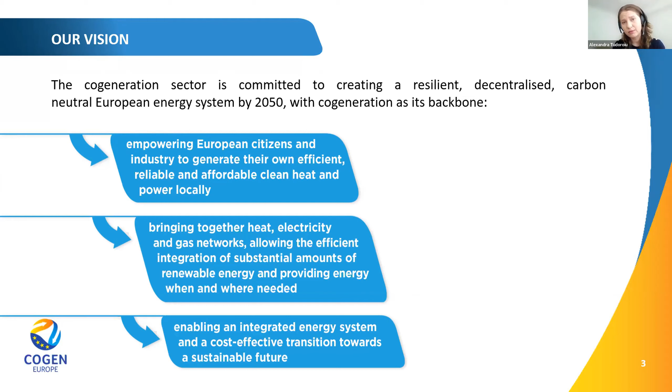And so cogeneration does not only enable energy efficiency, but also higher integration of renewable energy sources and a more resilient energy system, because of course, we also provide more flexibility to the energy system, complementing renewable energy and electrification that we see is increasingly promoted.

So what is cogeneration? For those of you who are not familiar with the technology, cogeneration uses one input, and that can be any kind of energy source, from conventional energy sources like natural gas, to geothermal, solar thermal, also hydrogen that is being discussed quite a lot these days, any renewable gases, and less known solutions like waste heat. That can be a fuel input to cogeneration.

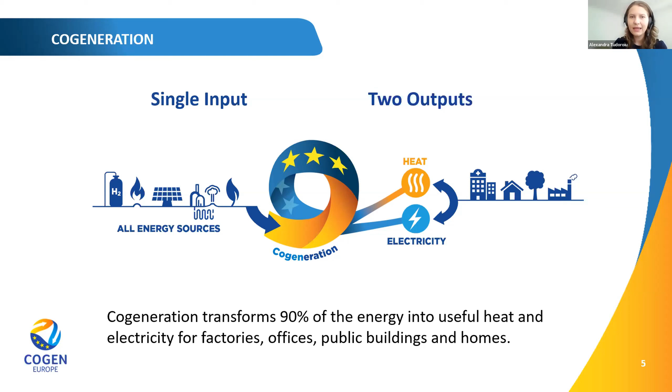So what are the benefits of CHP? Of course, energy efficiency and resource efficiency is the key benefit of cogenerating heat and power. However, in using energy sources that are available more efficiently, cogeneration also reduces CO2. As I mentioned before, it integrates energy systems at local level by flexibly supplying electricity, but also efficient heat, and also integrating, in some cases, the gas networks.

It also supports electricity grids, and as electrification is more and more taken up, we will need dispatchable and decentralized electricity production to ensure that electricity is available when and where needed. With CHP, we reduce the overall energy costs of the energy system by also reducing grid losses, since CHP is produced and consumed locally.

And this goes into more detail on how CHP supports energy efficiency. So compared to conventional technologies like power-only plants and boilers, CHP makes more with less, so it generates 40% more productive energy, as shown in this example, compared to an average boiler and an average power plant. It saves at least 10%, as mandated in the Energy Efficiency Directive, compared to the best and most efficient boilers and the most efficient power plants.

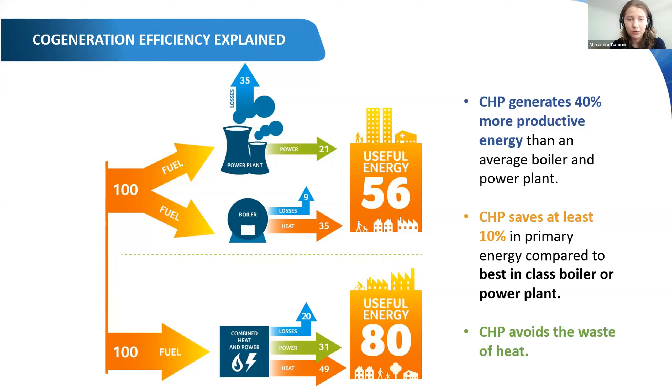And in addition, as it is located next to the point of consumption, it also reduces grid losses, which tend to be quite significant. So zooming out from just cogeneration and looking at the whole energy system, we see that quite a lot of energy is wasted across the whole energy value chain. Looking at the electricity sector in particular, conversion losses are quite significant.

So from 400 MTOEs of energy input, and this includes all thermal fuels, we still have coal in our mix, but also natural gas, biomass, biogases. It also includes PV and wind, the intermittent renewables. From all this fuel input, more than half is wasted as heat discharged into the air. And 22 MTOEs are also lost in the grids just to transport that electricity to consumers. To put things into perspective, the whole heat demand of EU buildings amounts to 192 MTOEs.

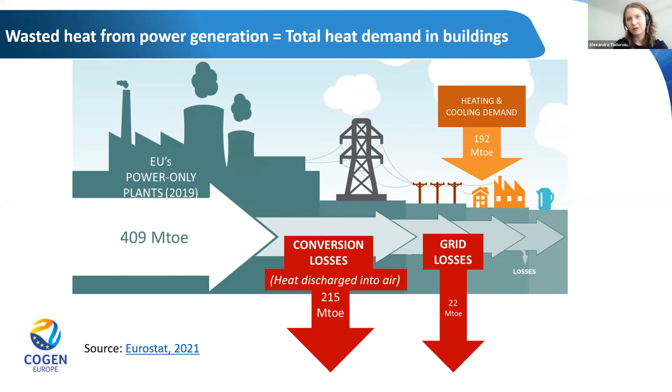So if we were able to recover some of this wasted heat and put it to use through district heating or in industry, we would already reduce energy consumption, significantly reduce gas consumption, and make the whole energy system less costly, as well as ensuring that consumers do not pay for energy that is wasted before it even reaches them.

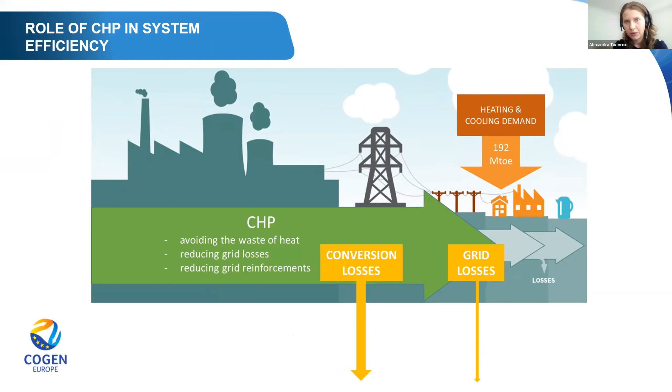So how can cogeneration contribute? Cogeneration uses all these fuels more efficiently, and it avoids the waste of heat, putting that heat to good use. It reduces grid losses, and it reduces the need to reinforce electricity grids, which will become more and more important in the coming years with a focus on electrification.

And of course, you can find CHP everywhere. As I mentioned before, there are applications in industry, in district heating, and more innovative applications in individual buildings. And this is not always acknowledged. EU policy as well as European Commission strategies like REPowerEU focus quite a lot on end-use energy savings, which are necessary, but do not focus enough on the whole energy system.

And in the current serious context of the war in Ukraine, it is important to understand that natural gas is not only used in buildings or the electricity sector, it's also used in district heating and across the whole energy system. So if we want to significantly reduce our dependency on Russian gas, but more importantly, for the sake of the environment, our dependency on fossil fuels, it is important to look at the whole energy system rather than each sector in isolation.

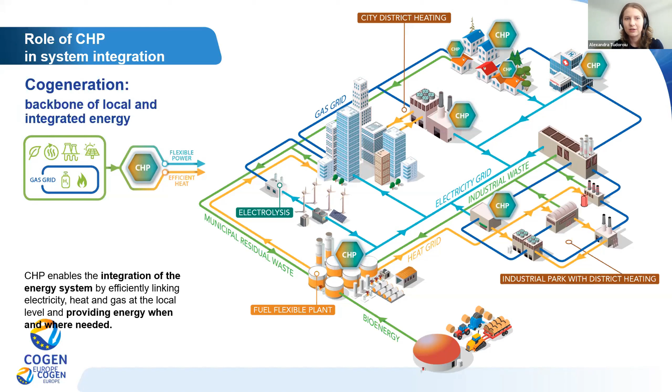So with that introduction, I would like to very quickly switch to our case studies today. As I mentioned, REPowerEU focuses on rapidly reducing our dependence on Russian imports of all fossil fuels, natural gas in particular. In that context, I will share a few numbers ahead of the panel discussion, but we have chosen some quite exemplary cases of cogeneration that already contribute towards significant energy savings as well as security of supply.

So this is the overview of our speakers. We will start with 2G and the example of Hassfurt city in Germany, presented by Andre Banken. Then we will continue with a case study from Belgium, focusing on local production of biogas, achieved with the help of CHP. This will be presented by Mr. Jiří Jansa from TEDOM and Christopher Stuntz from Cortec Energy.

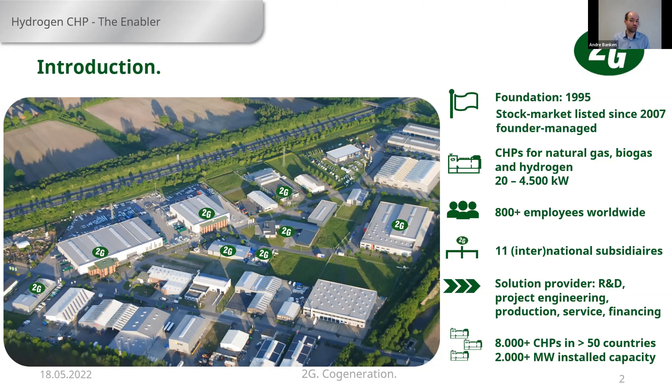And our install base these days is more than 8,000 units in give or take 50 countries. Among the EU members, I would say every single one of them is represented. And the total installation capacity by end of last year was around 2,000 megawatts of electrical generation capacity. And of course, the same amount of thermal generation capacity likewise. What a cogen system is, Alexandra already gave you all the facts and figures there. Just let me point to one item.

CHP, of course, is heat and electrical power, but that heat can be used in quite diverse ways. So you can use it as hot water, which is the most common one, but it's also possible to utilize that heat as steam production or even as cooling energy via combinations of absorption chiller technology or a steam generator. So it makes CHP application, especially for the commercial and industrial sector, much more versatile, as the type of thermal energy that is actually required on site can be provided in combination with a cogen system.

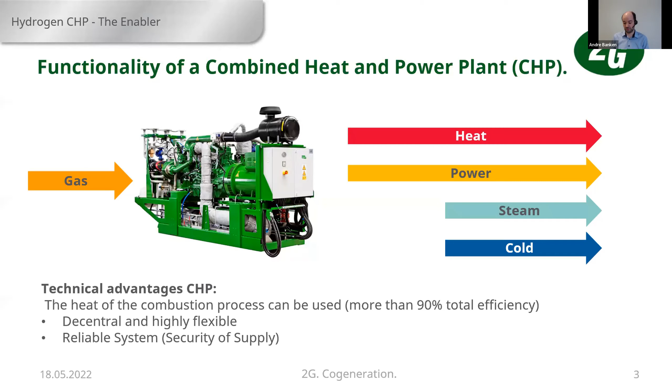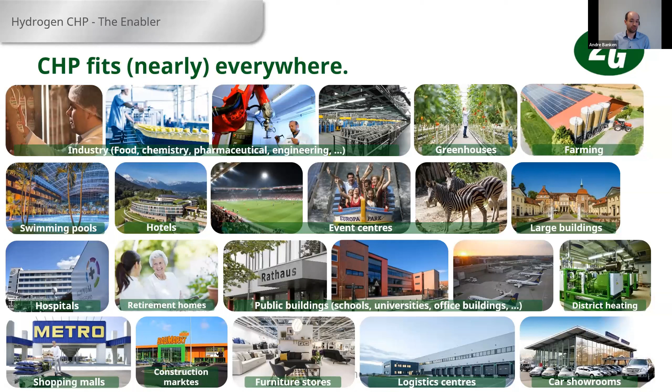In recent years, and this is the 2G perspective, especially the two sectors in the middle that you can see here, let me put on the laser pointer, had a strong drive. So the food and beverage processing industry, as well as the general manufacturing industry, have, from our perspective, become more attractive for cogen application, as both of these industries have 24/7 production cycles and a constant demand for power and heat. And especially the food and beverage sector is a high quantity, low margin business. So every cent on energy costs saved is profit for them.

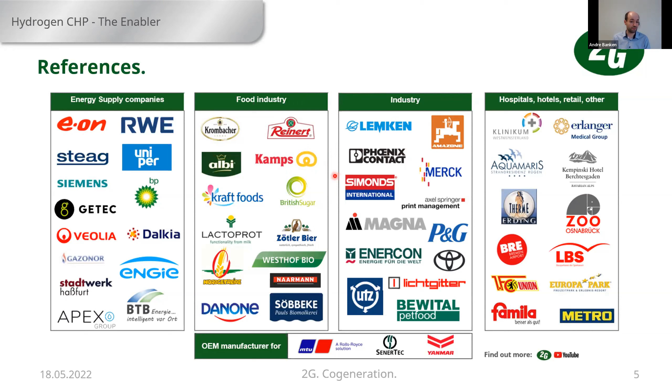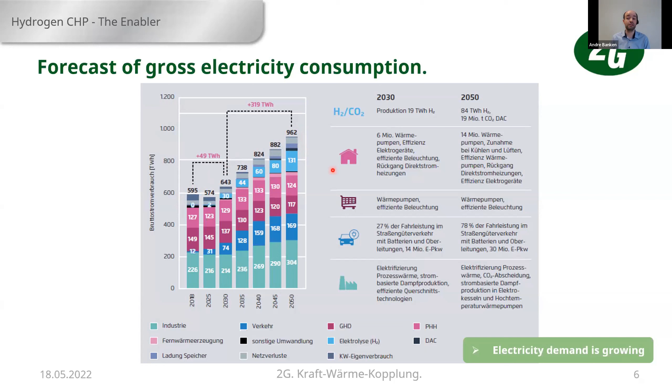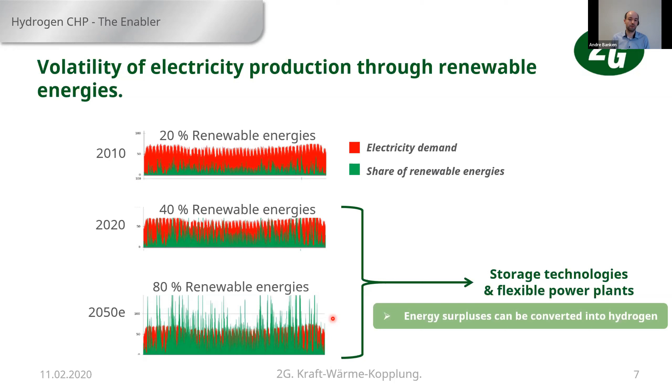And this is again where cogen technology, where cogeneration systems come into play to address both the increasing energy demand and the increasing volatility in the power grid. So cogen by hydrogen can be a stabilizing factor.

But of course, in the same manner, we do not only want to have a decarbonization of that power supply, but we also need to address the increased power demand and further have CO2 emission reductions.

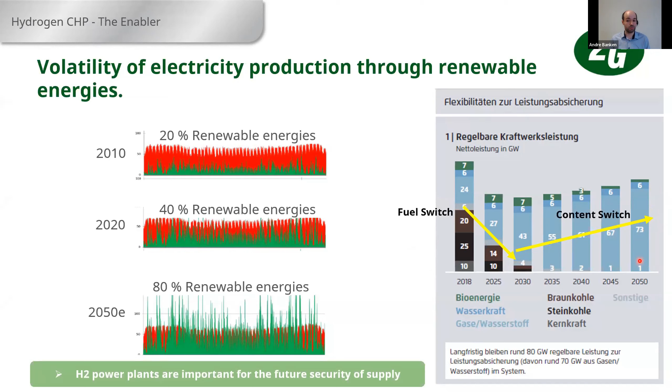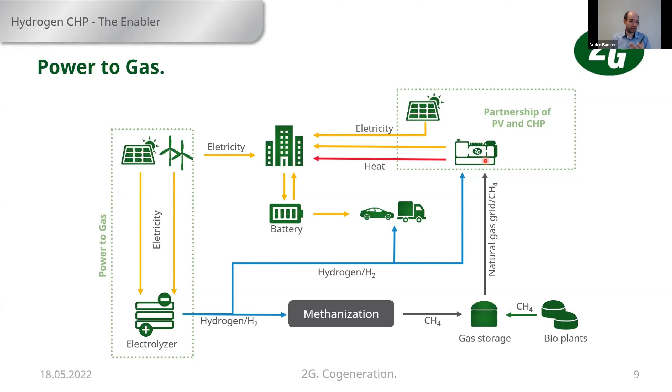How that works is obviously with power to gas technologies. I guess most of the participants here are familiar with how it works. The excess electricity from wind and solar is converted into hydrogen and then either directly used on site, for example for fueling cars, or in a locally installed cogeneration system where it can work in conjunction with the other renewables, or it is injected into the existing gas infrastructure where it is mixed with green gases coming from biogas plants and biomethane injection facilities to have an overall, as I mentioned earlier, content switch in the infrastructure.

From the technology perspective, 2G is a gas engine-based cogen system manufacturer. It is possible to have that change. So if you have systems that are running on natural gas or biogas today, they can be converted in the field to hydrogen operation. Without bothering you with the technical principles, in general, we change from an external gas-air-fuel mixture system to an internal one, a so-called hydrogen injection one. And this allows us, with the gradual increase of hydrogen and green gases in the overall gas infrastructure, to use and utilize cogeneration systems at the distinct installation site for the demands of the customer.

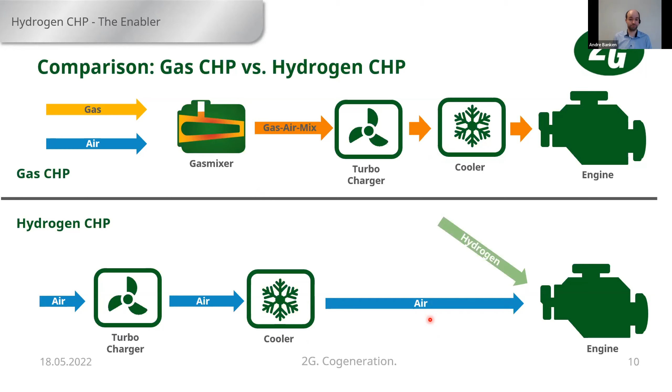Furthermore, it's a highly versatile system because we do not have to consider it as the flipping of a switch, but if necessary, as a gradual changeover. So with increased change of the composition of the gas infrastructure, with the supply of natural gas from different countries, with the additional injection of biomethane, and with the utilization of hydrogen, cogeneration technology can cope, can match all of that. So it is a future-proof technology that allows, with an increased operational capability, to cover residual loads and also peak shaving, helping to stabilize the public electricity grid.

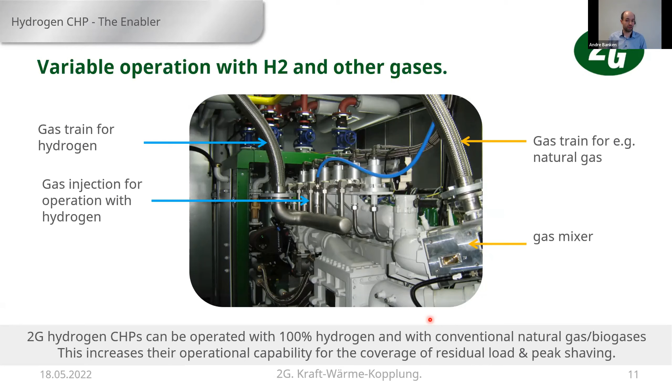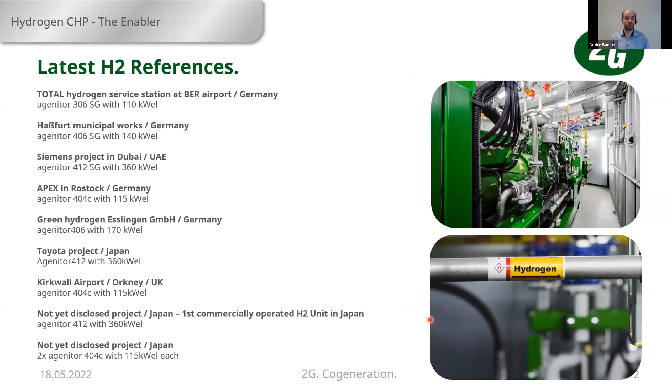The number of references our company has is increasing. You see here an overview of that, but as initially introduced, we want to focus on the city of Hassfurt, which is in South Germany. And there you basically already have how some envision the future energy infrastructure. So you have renewable energy, which is locally installed by wind and solar and even biogas.

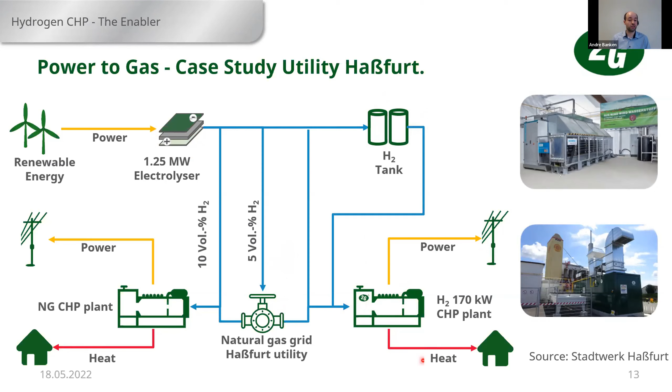Excess energy that cannot be used in the Hassfurt city energy infrastructure is then via an electrolyzer converted to H2 and either stored locally, so they have a 12-hour H2 storage there, or directly injected into the existing gas infrastructure of the local utility. The cogeneration systems then produce the hydrogen-based power on demand. So when there is a gap in power supply by wind and solar, depending on weather conditions, the thermal energy is injected into the local district heating.

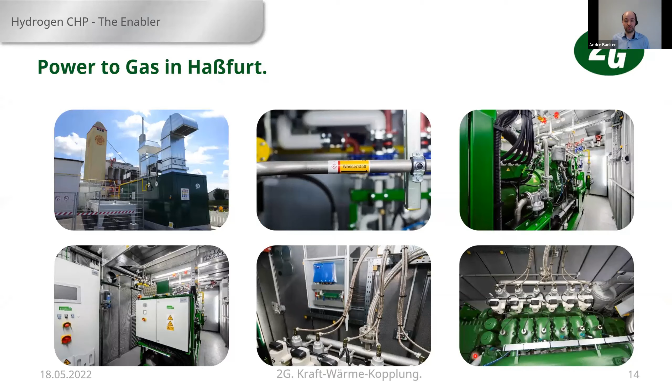You can see a few pictures of the system there, how it is installed. That was done back in 2018. So it's not brand new. It's already in operation for a couple of years. And here again, the quick numbers. So 1.25 megawatt PEM electrolyzer, H2 CHP unit, 170 kilowatt electrical, 200 kilowatt thermal, a 12-hour hydrogen storage, and even a station for the H2 injection into the existing gas grid in case that storage is already full.

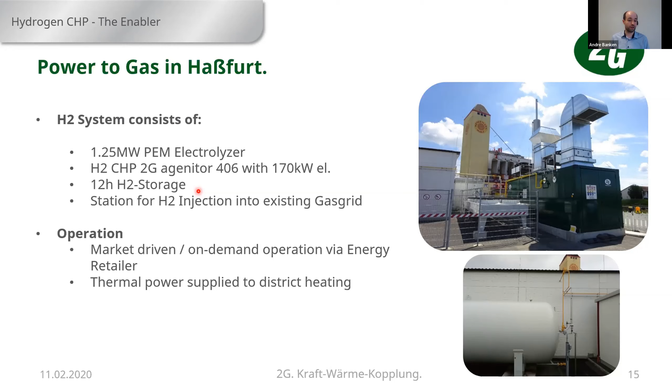And why does that make sense in the case of Hassfurt and much more in the greater concept? This is how their energy supply concept already looks today. So 10 megawatt of PV already installed, 31 megawatt of wind already installed, 2.35 megawatt of biogas plant capacity installed. So they have wind, solar, and biomass, which is operated with an overcapacity 3 megawatt biogas cogen system. Again, power supplied to the energy infrastructure of the utility, heat injected into the district heating network. So the entire city has district heating available in conjunction with smart metering and the transformer stations, to better regulate the power supply and demand.

And of course, they will add more electric vehicle charging stations. So the city just started with that, but they want to increase that over the next years as well, making the power demand in the city more challenging. And to save that excess energy from 10 megawatt PV, 31 megawatts wind, and 3 megawatt biogas, this electrolyzer was installed that I showed earlier with a localized H2 storage, so that the stored energy can be converted back into power and heat on demand as required. So this is already existing today.

What Hassfurt wants to add in addition to that is an 8 megawatt battery storage with a challenging 10,000 smart meters in shops, in restaurants, in local hotels, local companies, public buildings, to establish a smart grid so that really the management of power supply and demand, not only electrical, but also in heating, can be managed much, much more sophisticatedly. And also a hybrid compensator energy storage shall be included there.

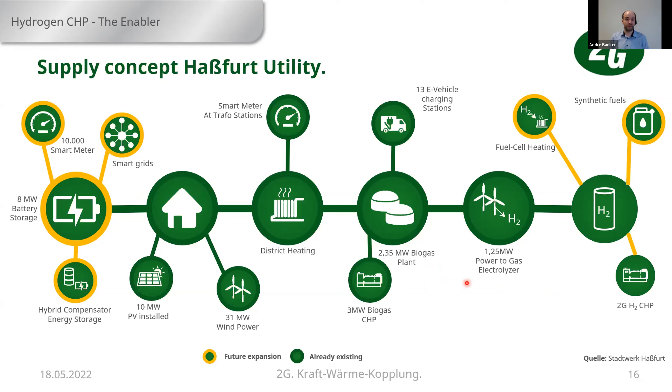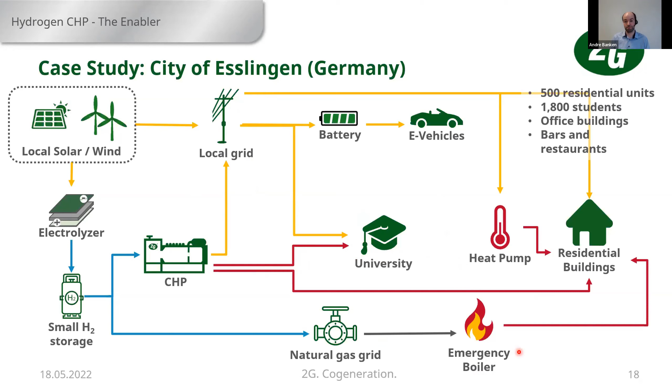So to summarize, from our perspective, CHP can and should be one of the backbones of the energy transition. It's a decentralized supply. That means power and heat is produced where it is needed, when it is needed. It helps to stabilize the grid. These units are highly flexible to provide power in case of grid fluctuation, so it helps stabilize the power grid. Therefore, it contributes to the security of supply in general.

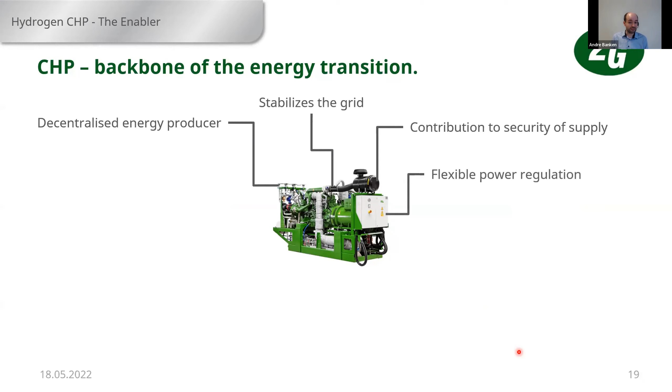It's highly flexible on-demand operation, as I mentioned earlier. It's compatible with virtual power plants, so you can operate them in concert with other thermal and electrical energy sources. It is highly efficient, as Alexandra introduced earlier, therefore very economical. It's easy to maintain, as globally trained personnel is available. And of course, it's highly flexible when it comes to the fuel supplied.

Hydrogen is a possibility, also so-called waste hydrogen, for which we receive a lot of inquiries from the chemical industry right now, which often have unused hydrogen available as a byproduct from their day-to-day production process. Gas engine-based cogen is insensitive to the impurities from that waste hydrogen, so that can be utilized as well.

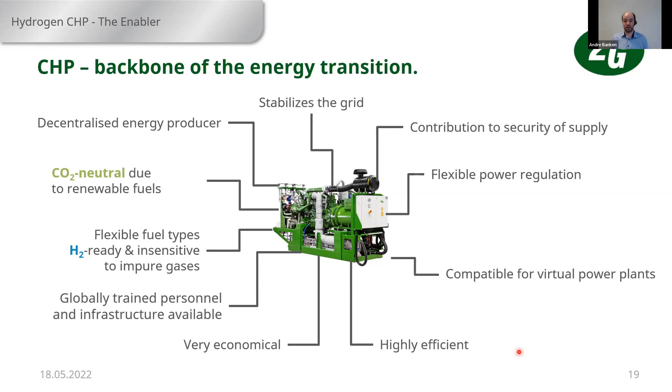And of course, it's a CO2 neutral technology due to the increasing composition of hydrogen and biomethane in the overall energy and gas infrastructure, so that we really have a reliable, affordable and also sustainable way of producing electrical and thermal power right where it is needed for the end user base. It doesn't matter if it's a residential, an industrial, or a commercial application.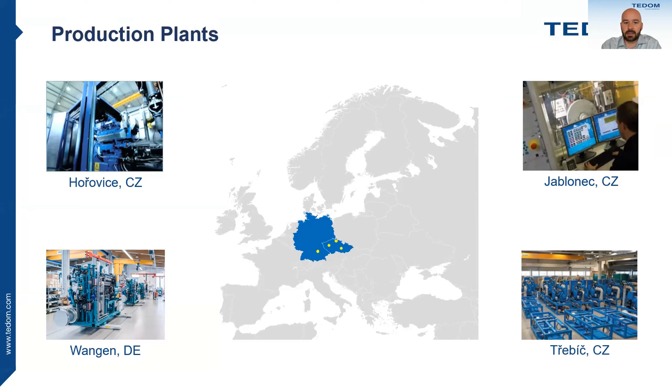We are exporting and have subsidiaries all around the world, most importantly Czech Republic, Slovak Republic, Poland, Germany, and United States. In other countries, like Belgium, we work with business partners that provide sales and services of our equipment, and even installation and operation. The CHP portfolio starts from 20 kW up to 4.5 megawatts.

The portfolio is designed for all gases, meaning natural gas, but also, the topic of today, other renewable gases: biogas, coal mine gas, sewage gas, any gaseous fuel with methane content. We are also ready for the hydrogen mixture that is available in the pipeline and will be available in the next 10 years in certain content in the current infrastructure. The portfolio is already ready for a mixture of up to 20% hydrogen. So if there are questions about the readiness of the technology, we are ready for the hydrogen that will be available in existing infrastructure.

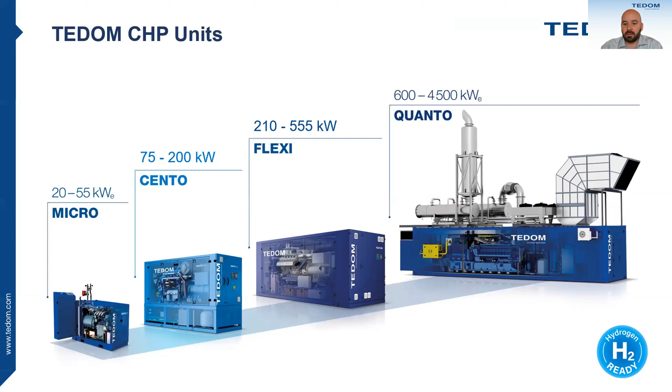And as time goes, there will probably be parallel infrastructure for hydrogen by the time complete, pure 100% hydrogen technologies will be available, even in our portfolio. But that's the question for the next 5 to 10 years, as was presented in the previous presentation.

One slide where we see the big potential of CHP, and it was also mentioned already, is the flexibility of the CHP, of the whole portfolio, not of the individual CHP itself. When we combine the portfolio together, we can provide balancing of the network. And we already did a pilot project for the Czech transmission system operator, where we aggregated one block and certified it for ancillary services, and we are already providing regulation, negative regulation, for the TSO.

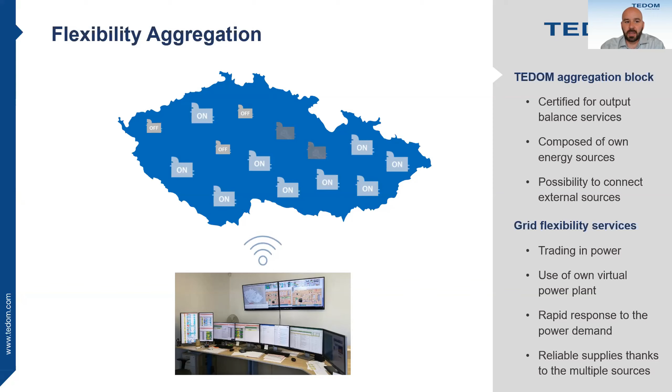This system works on biogas and landfill gases, where we can stop production and down-regulate the power output to the grid. With these systems, we are helping the TSO at times when the electricity is not needed, especially when there are a lot of renewables connected to the electricity network, solar and wind, and they need to be balanced. This is an important part of CHP for the future, and it will play a more and more significant role as time goes on, because we will need to balance the grid with more unstable sources being connected to the network.

To be able to do those more advanced features and provide services that are important for CHP owners, we also acquired an electricity and gas seller. So we are offering gas to CHP owners and buying back the power. So CHP owners do not need to care about trading and operational stuff, and we can do one-stop shop services for them, including financing and operating of the CHP sources.

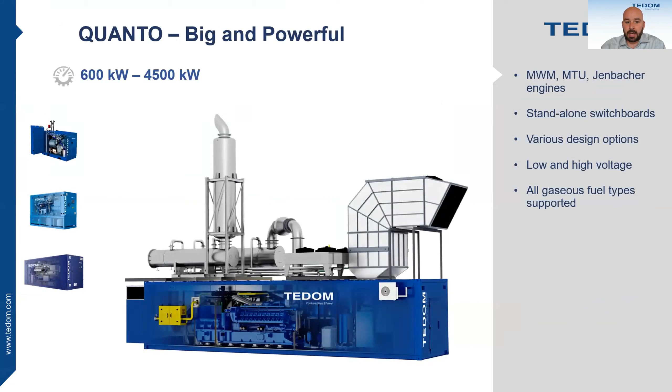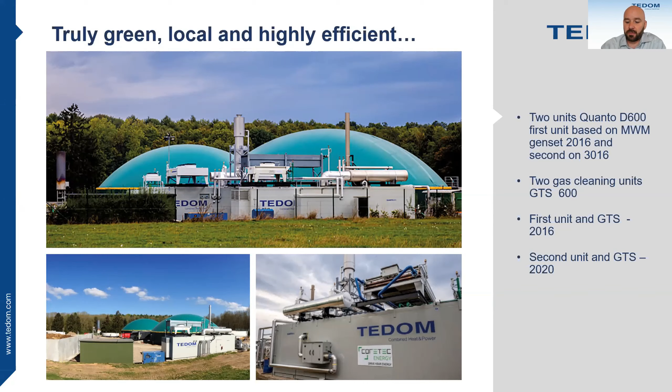Now we are getting to the project. We used the Quanto system for the project in Belgium, which is shown in the picture. Here is the picture from the site, where you see the biogas plant in the back, and in the front two CHP systems from TEDOM, which are based on MWM engines. The first unit was delivered in 2016 and is based on the MWM engine. The second was delivered in 2020 and is based on a newer, more efficient type of engine. Both CHPs were delivered including the treatment system, which filters the gas and provides cleaner gas for the CHP.

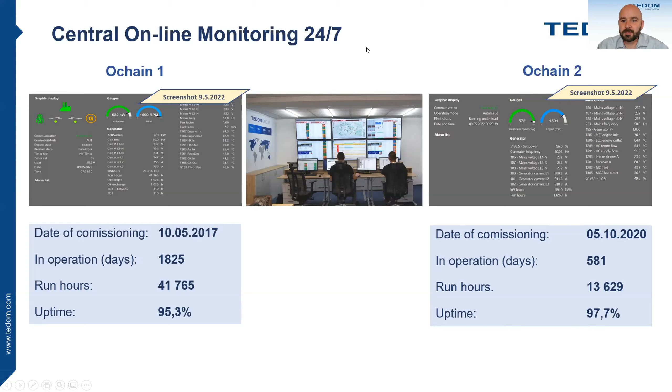And with this, I will hand over control to Christoph, who will tell you more about this project from their perspective as operator. Christoph, it's up to you now. Yes, thank you, Jiri. I'll try to control it. Yes, I can. Perfect. Great. So thank you, Jiri.

Hello, everyone. I'm Christopher Stunz, responsible for the thermal business unit at Coretec. Before detailing the project, I would like to quickly introduce Coretec Energy. We are located in Belgium, near Liège, and our mission is to improve the competitiveness of all our clients by optimizing their energy costs. For that, we have two main parts in the company. One relates to all the projects for which we study, finance, implement, and provide complete maintenance, operation, and remote monitoring of high-performance production systems, such as CHP units running on natural gas, but more and more on renewable gas, and we are also involved in biomethane projects.

On the other side, we help all our clients with their energy strategy for purchasing and sales, as well as for trading the green certificates that are generated with the production of electricity through CHP units in Belgium.

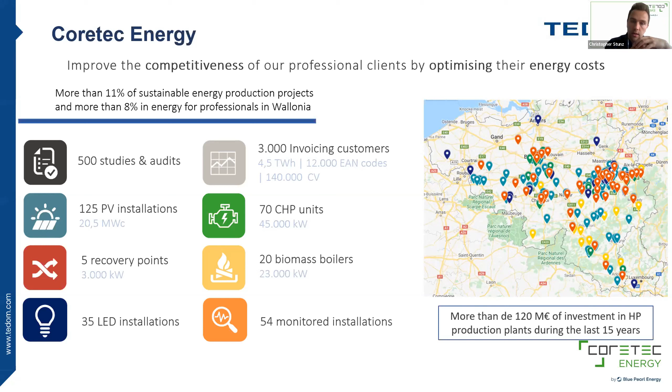In recent years, current projects, but also those to come, have increasingly concerned engines running on biogas rather than natural gas. Now concerning the Ochain Energy biogas plant, in which Coretec is a minority shareholder and also the integrator. We took care, as Jiri said, in partnership with TEDOM, of the integration of these two units in container, and also associated with the treatment of the biogas for each.

Coretec was also involved to realize the medium voltage and the low voltage electrical works on the site, as well as the system for the main regulation of the whole plant for remote control. And after the first CHP unit installation, a heating network has been done. So as Jiri said, the two units are in container, each one with full power of 600 kilowatt, but the capacity of the digester is limited to approximately 1,000 kilowatts.

So that's why in your example, you say that the two CHP units are not running at full load, but it's designed like this to have a little margin. So it's just normal. The actual annual production for the combined units is 8,000 megawatt hours. So they produce electricity with a quite good efficiency of approximately 40%. And it is also valorized as hot water.

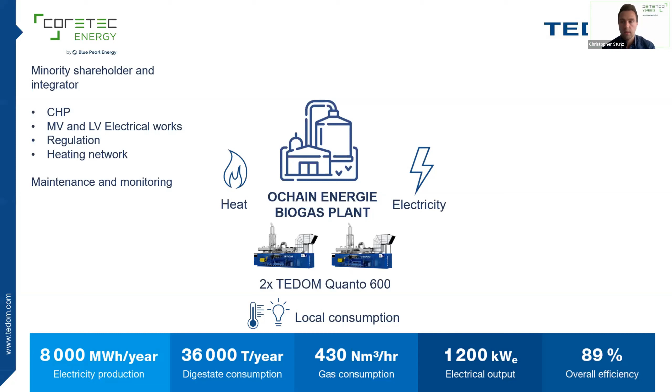Yes, so they produce, as I said, electricity and hot water. All the production is dedicated to local consumption. And the heat is, of course, valorized in the digester, but after that, with a heating network of approximately 2 kilometers, the hot water is valorized to heat a nursing home. And this allows the nursing home an annual saving of more than 150,000 liters of fuel per year.

The main part of the electricity is sold to the grid, which is, of course, the main income of the whole plant, in addition to the green certificates. So the digesters are fed with more than 30,000 tons per year of agricultural waste within a maximum perimeter of 20 kilometers around the site, and also with waste from the agro industry. And all the remaining digestate is used as local fertilizer by the farmers in the surrounding fields.

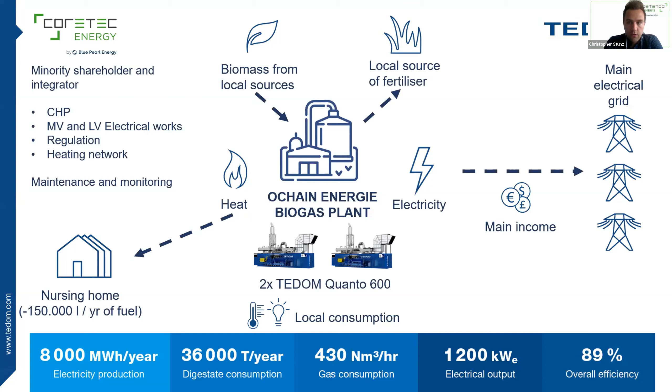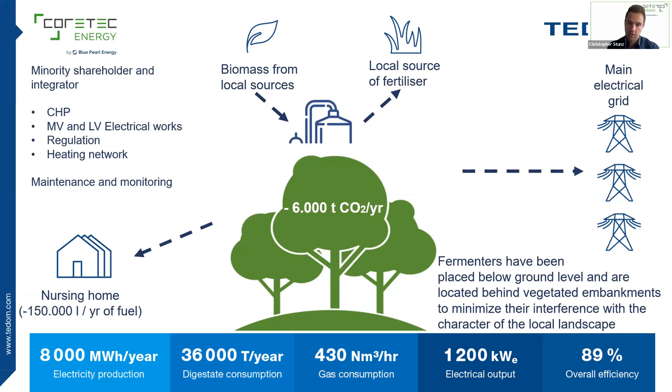This installation has also been designed to have, I would say, a minimum impact on the landscape. So it's located behind the woods. We also have a part of the digesters that are constructed below the ground level. And annually, it contributes to a saving of a bit more than 6,000 tons of CO2 per year. Yes, that's it. Thank you for your attention.

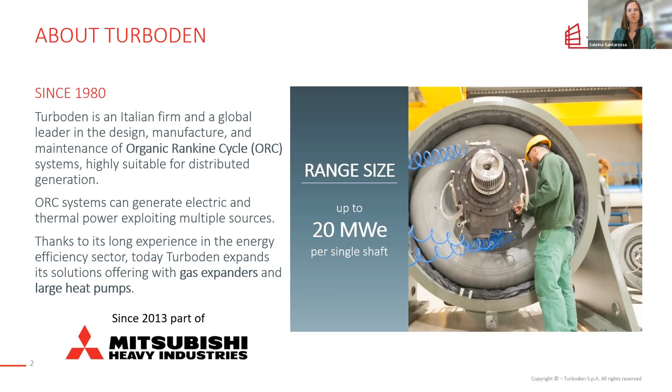The size of our product ranges from 500 kilowatt up to 20 megawatt with a single shaft. And the ORC can be used in connection to different kinds of sources. In any case, we need a thermal heat source. And today I will focus on industrial waste heat that is available from several industries, the hard to abate industry. We are not producing only ORC. In the last years, we are also producing large heat pumps, I will briefly also talk about this, and gas expanders. And since 2013, we are part of Mitsubishi Heavy Industries Group.

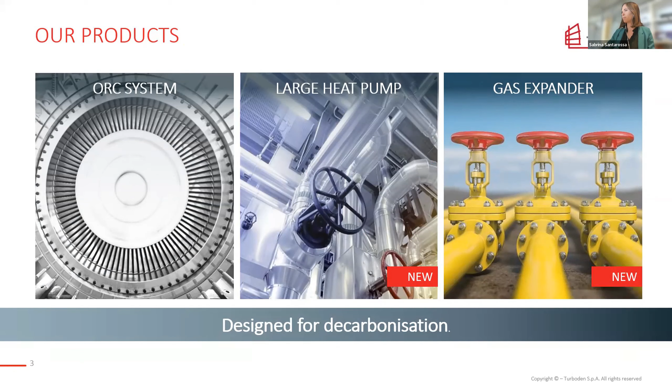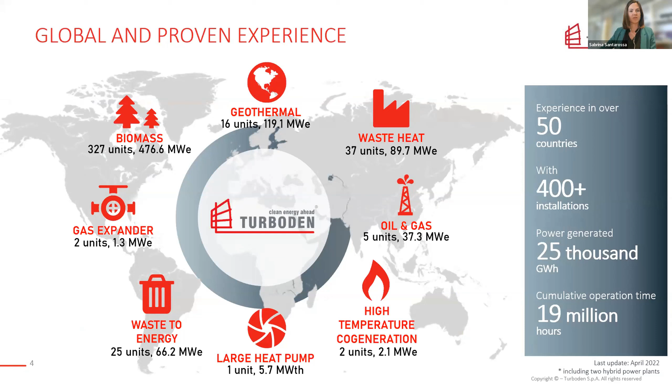And as you can see, we have also sold 2 gas expanders and 1 large heat pump that will start up in the next month. As said, our technology can be connected to waste heat from industry, and so we can help industries reduce their energy consumption from the grid. So our products can be combined with different heat sources that can contribute to decreasing CO2 emissions.

Our technology is usually in scope 2. So we help to reduce the energy consumption from the grid, and not a direct reduction of the CO2 emissions of the industry itself.

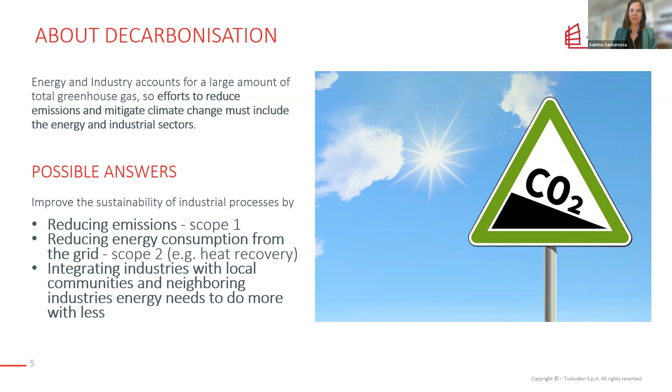Some characteristics of our technology are that it's a very simple, automatic technology, is not typically supervised, and can be remotely monitored. We don't consume any water, so we also have the benefit of not consuming water, which is becoming an issue in most countries. And the maintenance activities are reduced. It's an easy technology, but also easy to integrate in the industrial process.

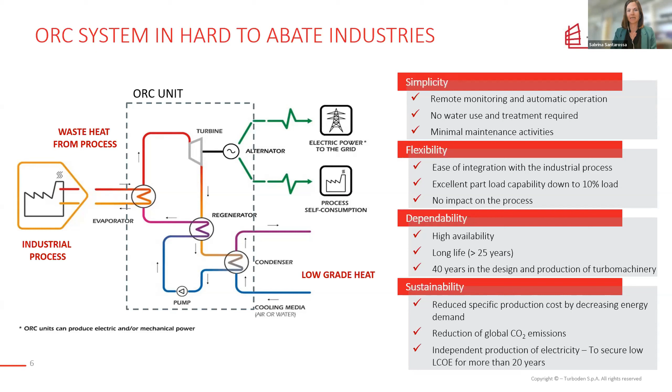And also very important these days is the fact that you can assure an independent production of electricity with a fixed cost for more than 20 years, because you are producing the energy with something that you already have. You don't have to burn anything in addition to produce this electricity. And so you are less exposed to the volatility of the electrical energy market, like we are seeing in these last months and during this last year.

Going deeper into the project that we are presenting today, this is a heat recovery project in a steel factory. They have an electric arc furnace, and we are recovering the heat from the exhaust gas of the electric arc furnace. The customer is Ori Martin, a steel mill close to our office, and the plant has been in operation since 2016, so 6 years now. The size of the ORC is 2 megawatts.

What is interesting about this plant is that we are not only recovering heat to produce electricity. This actually happens during summer. In winter, the heat that is recovered is sold to the local district heating network owned by A2A, one of the biggest utilities in Italy.

And so in summer, thanks to the ORC technology, we can light up to 700 houses, while in winter, thanks to the district heating network, we can heat up to 2,000 houses. This is equivalent to avoided CO2 emissions of 10,000 tons per year. That means not burning 1.7 million standard cubic meters per year of natural gas, which is quite important to underline in this period.

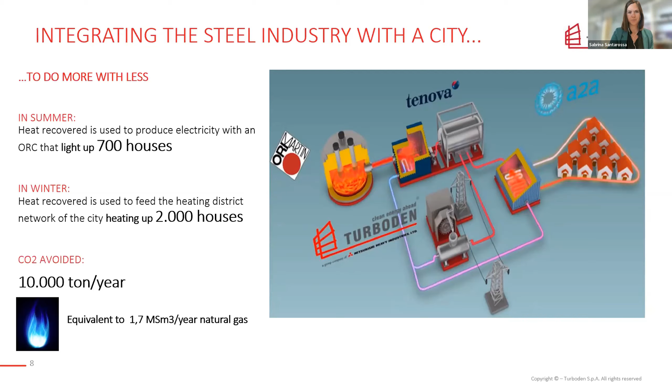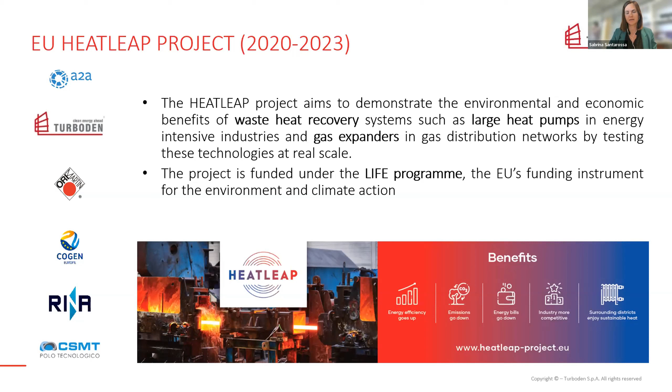In 2020 we also developed, together with A2A, with Ori Martin, also with COGEN Europe, with RINA, and with CSMT, a new project under the LIFE program. It is a funded project to increase the heat that is sold to the district heating network, to help further decarbonize the district heating network that is present here in our city. This is possible thanks to another technology that we are providing, the large heat pump.

So the new scheme will be the one shown here. We have the electrical furnace and, as you can see here, the primary circuit where there are the exhaust gases. There is this production of heat that is used, as I told you before, in summer to produce electricity, and in winter is sent to the district heating network. We insert the large heat pump in the secondary circuit.

So the low temperature circuit that is used to cool the electrical furnace. Usually the temperature of this water, because they use water to cool the electrical furnace, is low, let's say low-medium temperature, but surely lower than what is required by the district heating network. So thanks to the large heat pump, we can increase the temperature of this waste heat available, also waste heat at low temperature, and send it to the district heating network.

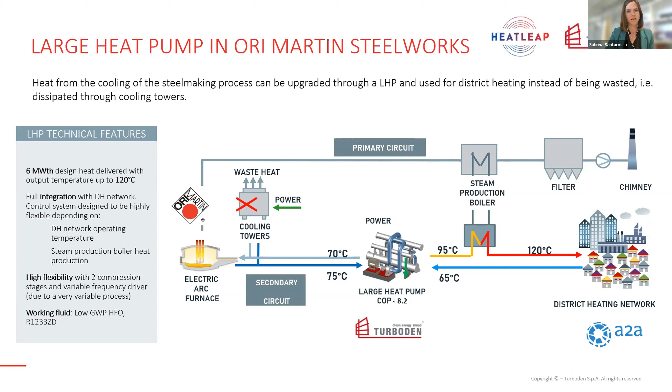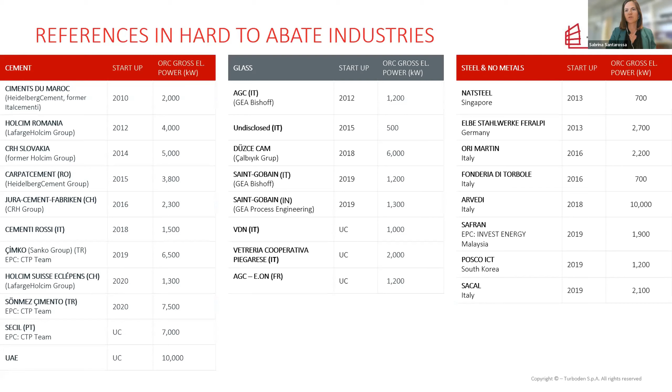This is one of the plants that we have, but in heat recovery we have at least 20 other plants in operation or under construction. Here I have reported the complete list of references in the cement industry, in the glass industry, and also in other steel or metals production. So we have experience and we can propose this kind of solution not only in the steel industry, but also in the other hard-to-abate industries that have waste heat.

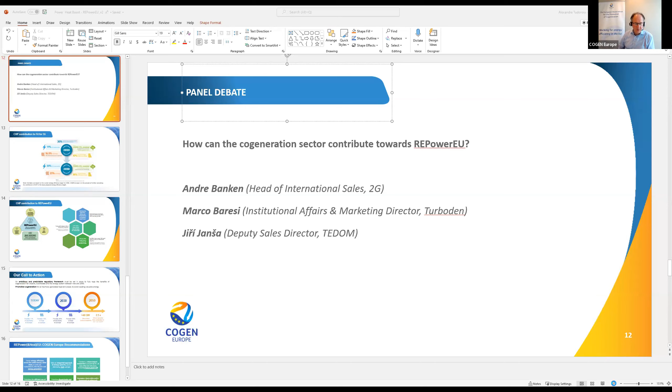Thank you, Sabrina. Because the time for the presentations was a little bit more than we had foreseen, I think it would be a good thing if we now move as soon as possible to the panel discussion, because that will help to put the cases that we've looked at in the context of the REPowerEU plan. So I would invite Alexandra and Andre, Jiří and Marco Baresi from Turboden to join us if you're able to do that. And I will hand over to Alexandra to lead the discussion.

Yes, thank you very much, Ben, and thank you to the speakers for presenting such compelling case studies. Now, the key question for today is, of course, REPowerEU. So the panel debate will focus on: are we ready to REPowerEU? From the measures that you have seen proposed, is that sufficient and cost-effective for Europe to be able to phase out fossil fuels in general, but also face the immediate challenges that we have in terms of security of supply and quite high energy prices?

Of course, the CHP sector is to some extent a user of gas, so it is impacted by the energy price crisis. On the other hand, cogeneration is also a technology that helps save energy, including all gaseous fuels. So we see this from different perspectives, of course. So one of the questions is, how do you see REPowerEU?

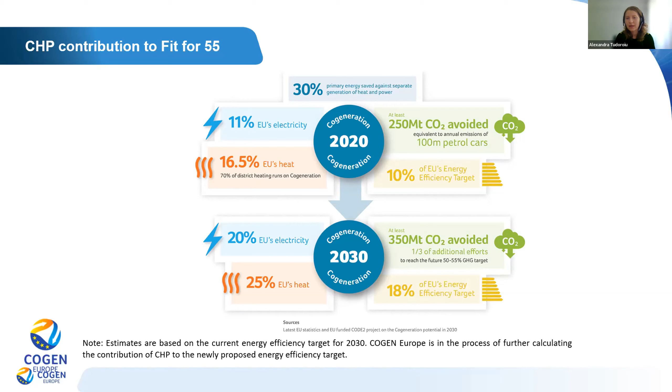This will ensure at least 350 million tons of CO2 avoided. That's about a third of the additional efforts required for Fit for 55, and about 20% of EU's upcoming energy efficiency target.

But then indeed moving to REPowerEU and translating all of this into BCM units, we do know that the REPowerEU objective has been set to 155 BCM of reduced Russian natural gas imports, which must be reduced by at least two thirds already this year, if not this year, in coming years, and fully by 2030. So how can CHP contribute here?

Already today, with the data that we have from Eurostat, CHP saves about 15 BCM of natural gas. That's 10% of the REPowerEU objective, and it's more or less equivalent to the behavioral measures that are proposed by the Commission. So turning down thermostats and reducing our own energy consumption.

This is indeed a good objective short term, and that can have rapid effect, but it's not really measurable, and it's not really something that can be implemented very easily, because of course it's voluntary. So in the short run, what we actually suggest is to safeguard this existing CHP capacity, because if CHP plants start going offline, then we will end up needing more gas to be used.

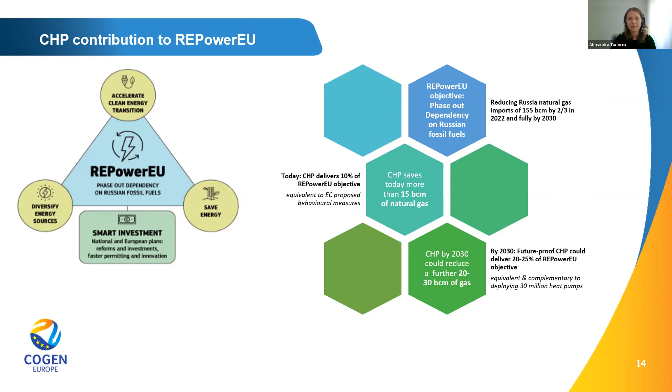So in terms of recommendations, we of course encourage a greater focus on energy efficiency first across the entire energy value chain, focusing not only on end use, so on demand, behavioral change, but also on efficient energy generation. Then the integrated approach to energy systems that doesn't only focus on electricity and electrification, but also on how we can establish synergies at local level between electricity, heat, gas systems.

We are also insisting on a robust impact assessment that takes all the cost-effective solutions into account, including, of course, CHP. And we have more detailed recommendations on CHP, but that is to be discussed, of course, in the coming weeks and months as we have the time to actually understand what the Commission is proposing and what the other EU institutions think about REPowerEU.